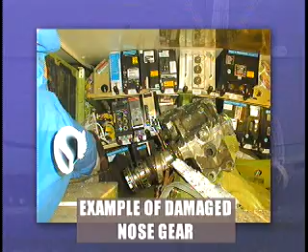actions during these few seconds will help ensure a smooth, trouble-free landing. Over the past few years, incidents of hard nose gear impacts have been increasing. If the impact is excessive, significant structural damage may result. In most incidents, the main gear touchdown was relatively normal. The structural damage resulted from high nose-down pitch rates generated by the application of full or near full forward control column during derotation. This video will examine hard nose gear touchdowns. We'll look at aircraft load design considerations and the effect a hard landing can have, and will increase your awareness

Let's begin by examining a typical hard-nose landing incident. As in most occurrences of this type, the flight proceeded without incident up until the actual landing. However, after the aircraft touched down on the main landing gear, it started to bounce. Although the landing did not seem excessively hard at the time, subsequent examination of the aircraft showed that it had sustained major structural damage. Several factors can contribute to hard nose gear contact.

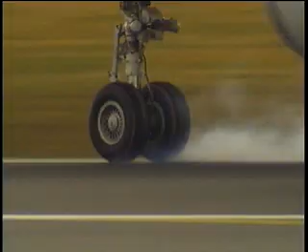In a typical landing, once the main wheels touch down, the landing derotation begins. You immediately begin flying the nose wheels smoothly onto the runway by controlling the aircraft pitch rate while relaxing aft column pressure. Control column movement forward of the neutral position should not be required.

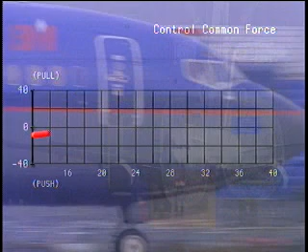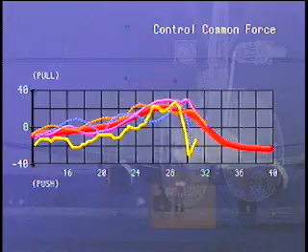This graph illustrates the control column force in pounds for a series of normal landings and landings where airframe damage occurred. As you can see, damage results from excessive forward column input.

Over the years, examination of flight test data from many landings with excessive nose gear derotation rates have resulted in enhanced design requirements that enable nose gear and fuselage structures to withstand harder nose gear contacts.

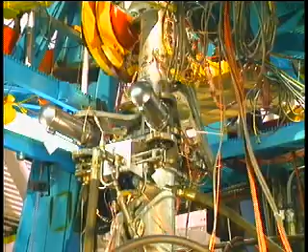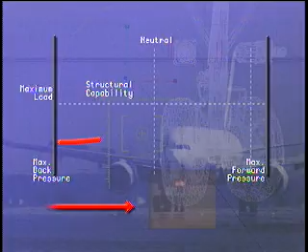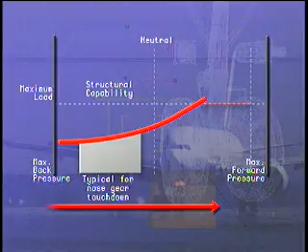However, as this illustration shows, large forward column inputs can result in loads that exceed the design requirements. During a typical landing, the maximum nose gear load is well below the structural capability of the airframe. As forward pressure increases, maximum nose gear load also increases, eventually surpassing the structural capability of the airframe and reaching a point where possible damage may occur.

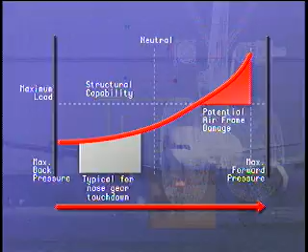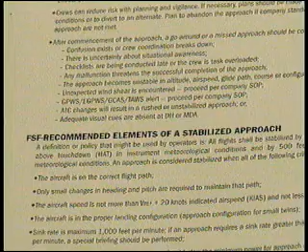Avoiding a hard landing that may lead to structural damage begins with a stabilized approach. The following parameters recommended by the Flight Safety Foundation define a stabilized approach and should be met by 1,000 feet above touchdown in IMC conditions.

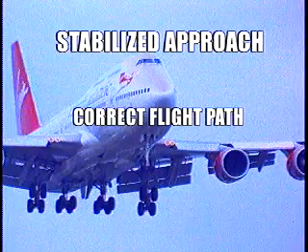The aircraft is on the correct flight path. Only small changes in heading and pitch are required to maintain the flight path. The aircraft speed is not more than VREF plus 20 knots indicated airspeed, and not less than VREF. Sink rate is no more than 1,000 feet per minute. The aircraft is in proper approach and landing configuration. Power setting is no lower than the minimum specified for the type of aircraft. And all briefings and checklists have been performed.

All of these approach parameters must be met by 500 feet, including visual approaches. The speed brakes should be armed for landing and the auto brakes set for the appropriate conditions. During heavy manual braking or heavy braking due to a high auto brake setting, increased back pressure may be required during derotation to reduce the derotation rate.

At the start of the flare maneuver for your airplane, smoothly increase the pitch approximately 2 degrees to reduce the descent rate, and smoothly reduce thrust to achieve idle at touchdown. Ideally, the main gear touchdown should occur simultaneously with the thrust levers reaching idle. After main gear touchdown, assure that speed brakes have deployed and initiate reverse thrust. Smoothly fly the nose wheel onto the runway by relaxing aft column pressure.

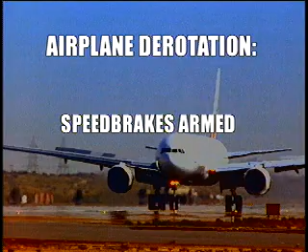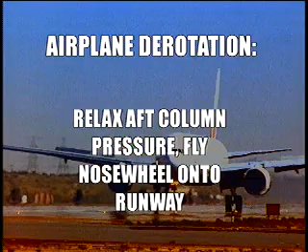During crosswind landings, it's not necessary to apply full forward column in an effort to improve directional control. Use only light forward control column pressure. The rudder provides the required directional control until the airplane is at a relatively low speed, and the rudder pedal nose wheel steering is used to complete the landing rollout.

If you experience a bounce upon landing, hold or re-establish a normal landing attitude and add thrust as necessary to control the rate of descent. If the bounce is shallow, what might be considered a skip, you do not need to add thrust. If a high hard bounce occurs, initiate a go-around.

While following these techniques to avoid a hard nose gear touchdown, you must consciously avoid putting yourself into a situation that may result in a tail strike. To do this, do not allow airspeed to decrease below a minimum of VREF plus 5 until starting the landing flare maneuver. Do not use stabilizer trim prior to or during the landing flare, and do not hold the airplane off in an attempt to make an extremely smooth landing.